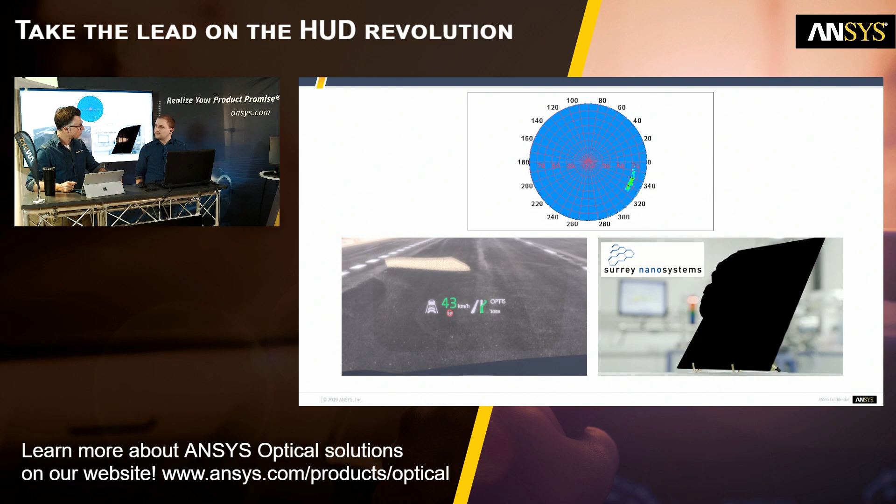Thank you, Cedric, and hello everyone. So as Cedric said, the agenda of today is to talk about the stray-light issue. It's a very common issue in head-up display systems that happens on almost all head-up display projects. So today we will first see how to detect the critical sun direction that will create this issue. Then we will see how to simulate this issue, and then we will see how to solve it in a very efficient way using the Vantablack material.

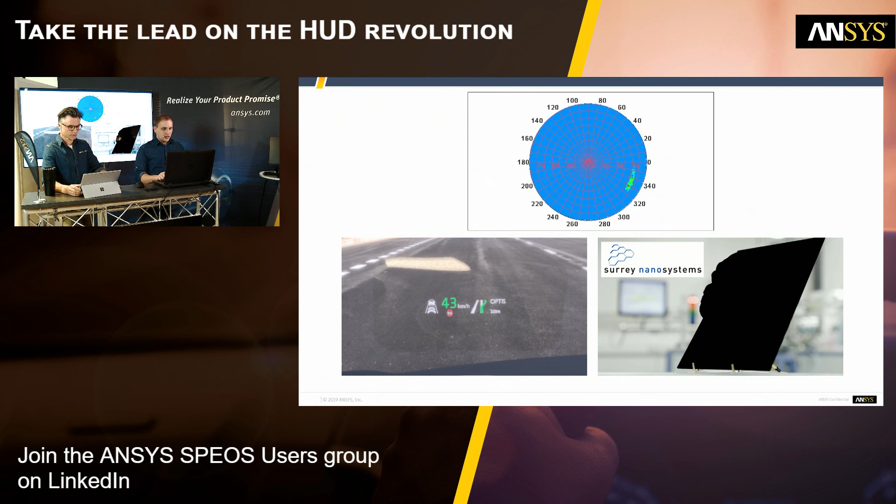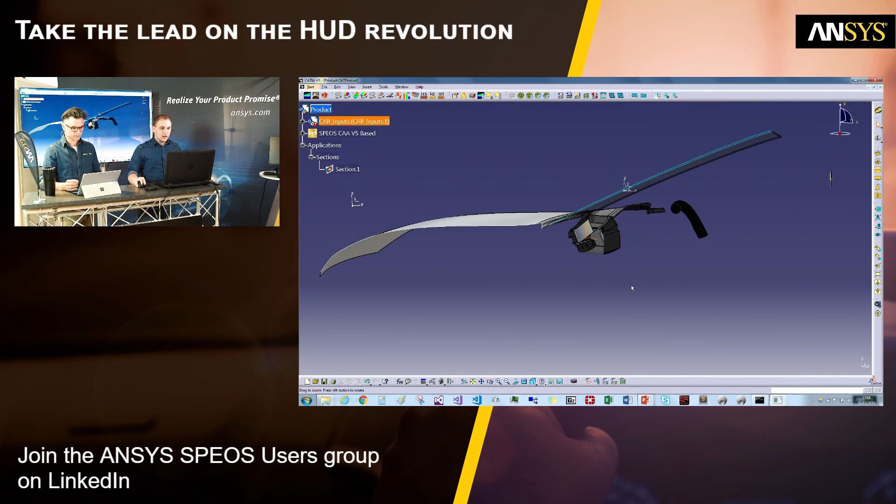So first, how to detect the critical sun position. So for that, I propose you directly go into the CAD software. So here I have an example of a simple head-up display system. As it's only for demo purposes, it's quite simple. If we have a look inside the housing box, we see that we have the mirrors, we have the picture generation unit, we have the housing box, the baffle, and the bezel. So a basic head-up display unit.

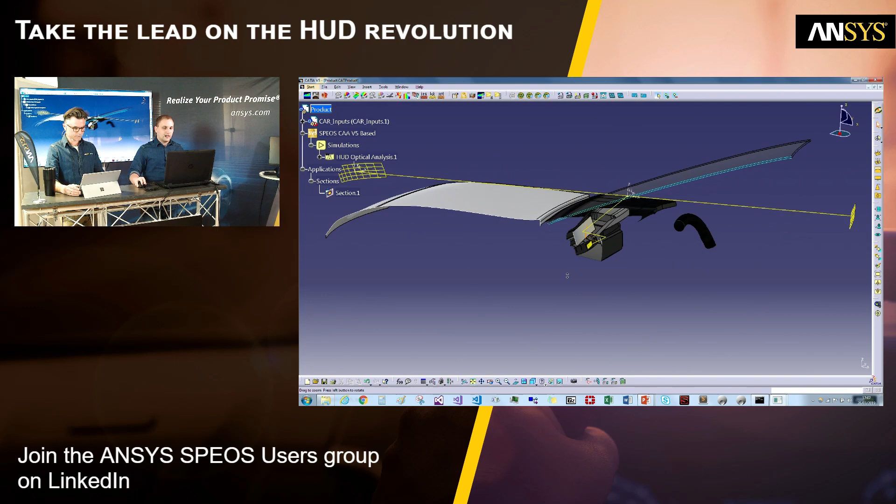If we have a look at the HUD Optical Analysis simulation, so if you don't know this kind of simulation, you can review the previous webinar. We already talked about this kind of simulation. So this heads-up display optical analysis simulation shows that the picture generation unit will create a virtual image here, visible from this eye box. So on my data, I put an axis system on my virtual image that I will use later, and also an axis system on the intersection of the optical axis and the inner surface of the windshield that I will also use later.

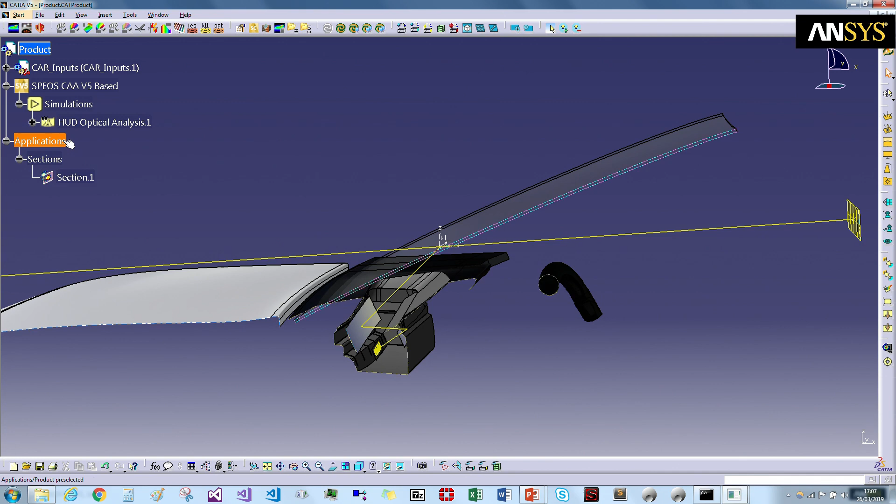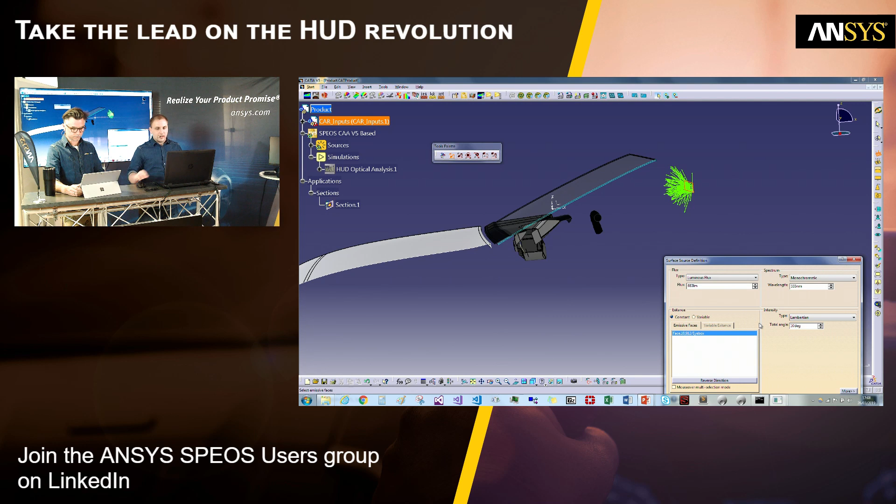So the goal of the first simulation we will do is to detect the critical sun position. So for that, we will emit light from the eye box and collect the light all around the environment. So first, we will define sources in the eye box. Oops. So here I have a source. I will collimate the source to send the rays in the interesting part, the head-up display system.

I don't care about the flux and the spectrum because for now, all I want is to detect the light path that connects the eye box to the environment. So for now, I just want to send rays to have this connection. And to collect these rays, I will create an intensity sensor here.

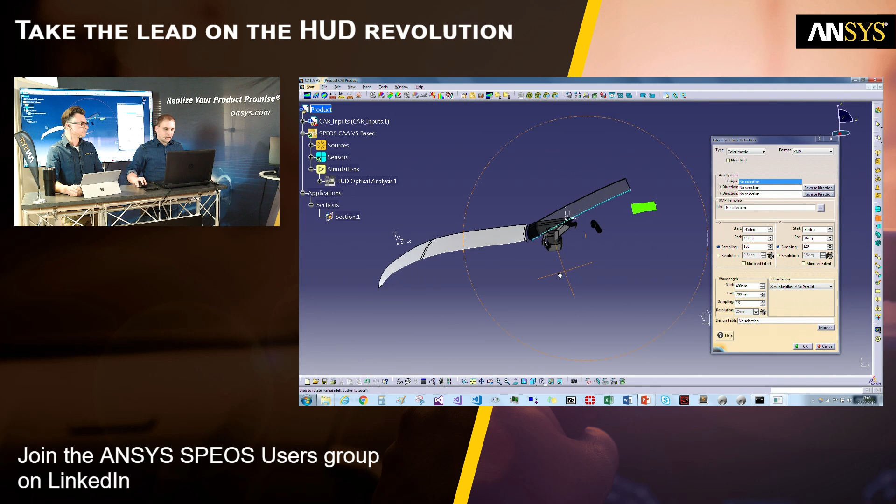So like that. So this way, I will just use a conoscopic sensor and cover more space.

I can increase the sampling of the sensor to have a better resolution. So now all the rays can be sent from the eye box, will be propagated into the system, reflect on all the part of the system, and then be collected by the sensor.

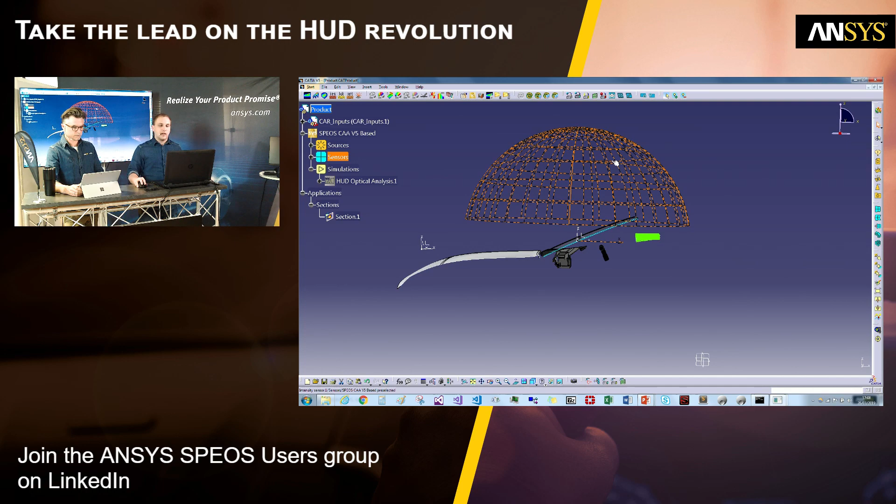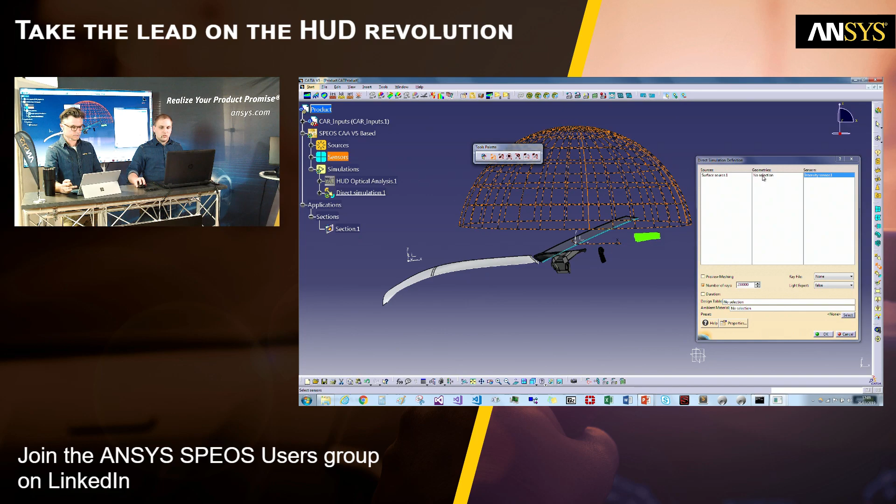So from that, I will create a simulation here, a direct simulation, where I will add the source, the sensor, and the geometry. So on the geometry part, I will add the picture generation unit, the windshield. I can add the eyebox also.

I will add the housing parts, as it's mainly the housing part that will create the stray light issue with the mirrors. So I will also add the mirrors. And I can add other elements here. For example, I will add the dashboard.

I will increase the number of rays I send. I will also activate the light expert mode because I will need this mode to visualize the rays directly in the 3D view of the CAD software, to visualize all the light paths that connect the environment to my eyebox.

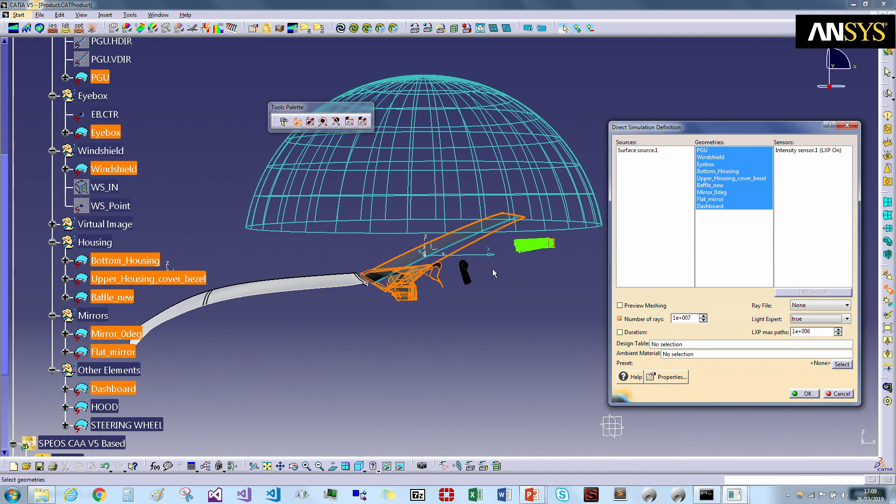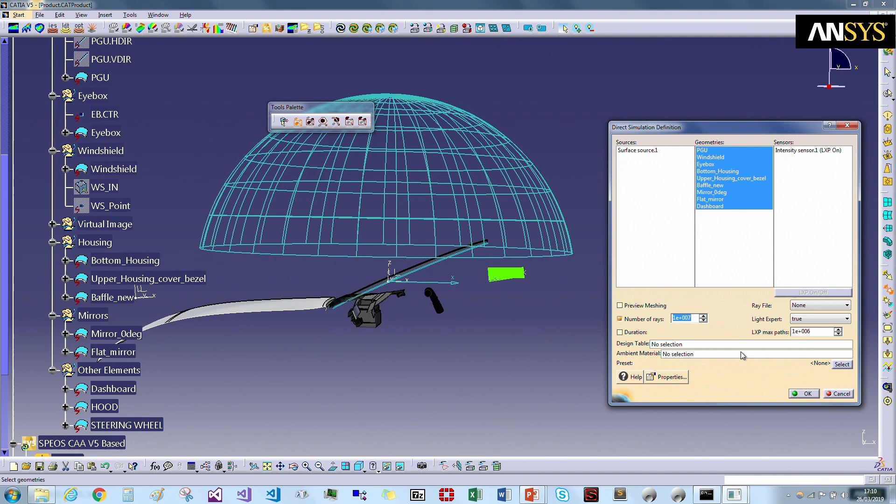And also here it's linked to the data I have. Here on my windshield I have two surfaces that represent my windshield, but I want to consider my windshield as a body. So I need to activate the volume optical properties on surface of the simulation, the VOP. So from now my simulation is correctly set.

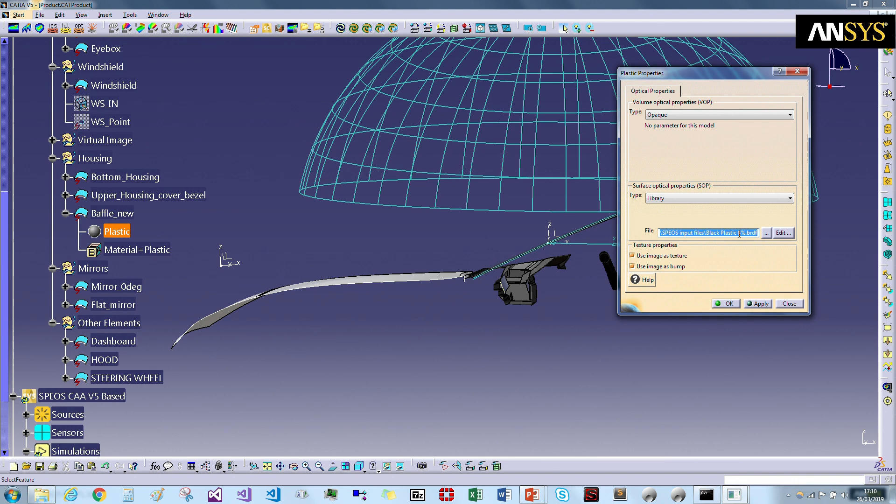I already applied the material to the geometry. So here if we have a look on the baffle, for example, I already have a material with Speos properties already applied. So here we can see that we already apply a black plastic that has about 6% reflective part.

So from that, I will run the simulation. And during the simulation, all the rays will be sent from the eye box, will propagate into the system, reflect on all the geometry I set, also the mirrors and also the housing.

And then I will collect back the rays on my intensity sensor, and it will create some hot spots on my intensity sensor where I know there exists a light path that connects this hotspot to my eyebox and that can carry a lot of light, I would say.

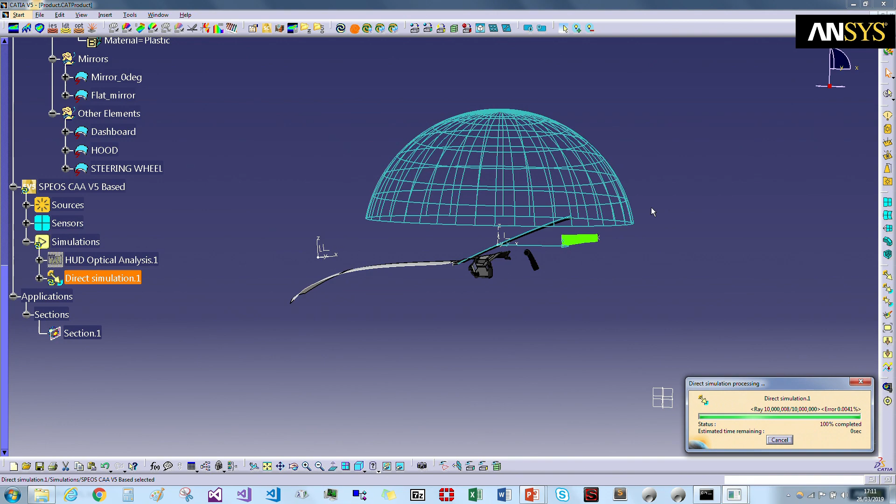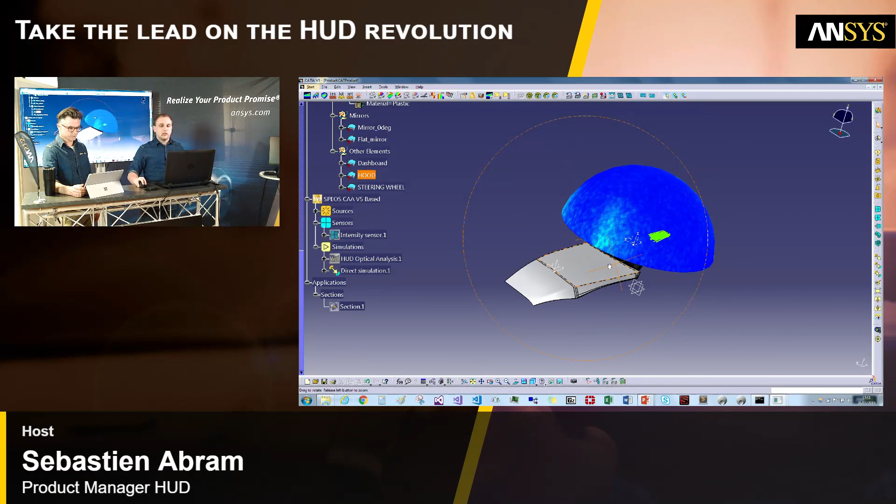So here's the result of the simulation. I will just hide the sensor and the section here. Okay. So here I have the different critical sun positions. We can see in red the very critical sun position, in blue the non-critical sun position.

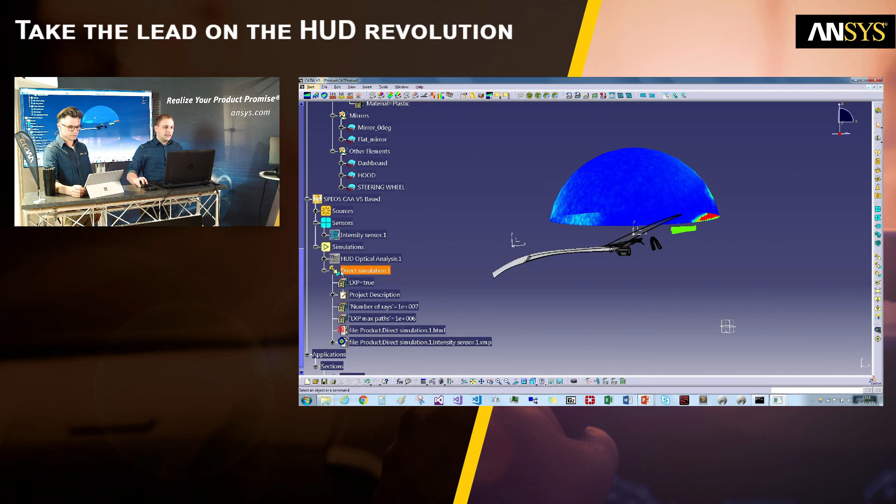From that, because I activated the light expert in the simulation, I can reopen the result and visualize in the 3D view the light path that connects one specific sun position to my eyebox.

So here, for example, we do have some.

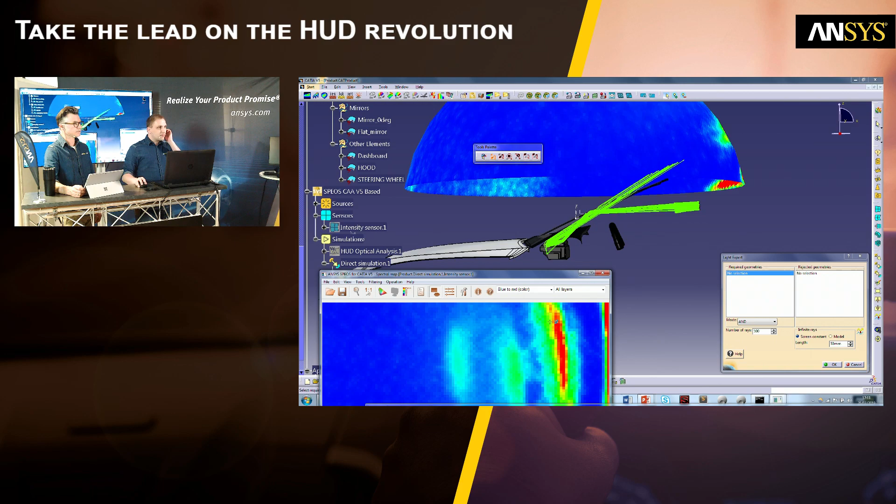How do you currently solve stray lights? We do have some words - they use CAD, physical prototypes, ray tracing, and simulations.

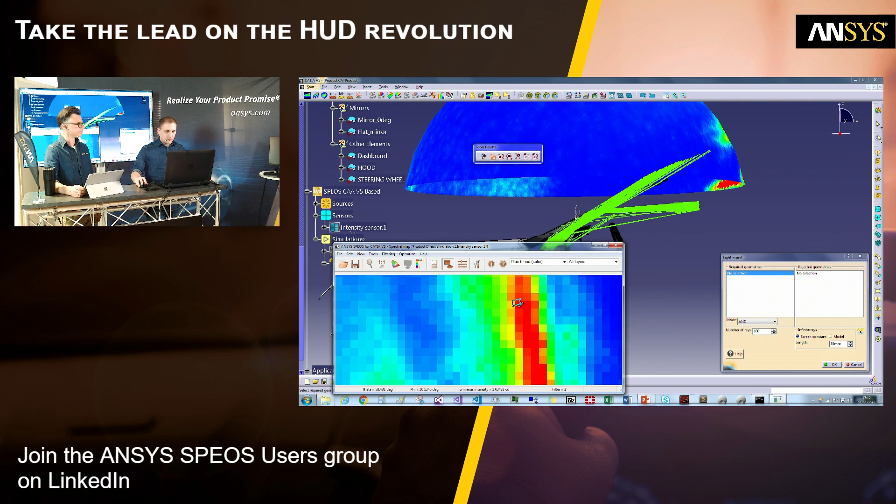And we will analyze this area right here. I will reduce the number of rays displayed to visualize more correctly the light path. I will also...

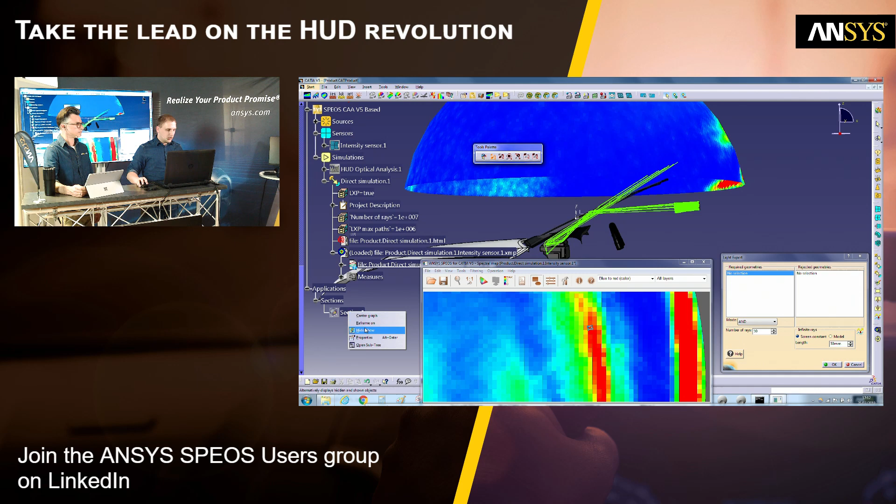activate the section here. So from this hotspot, from this sun direction, what we see is that the light goes through the windshield, then hits the top of the freeform mirror, hits the bezel, and then hits the windshield, and then goes back to the eyebox.

So from this critical sun position, some rays go to the eyebox and can create stray light. So I will extract these rays here, clicking this button. Here, okay, okay. So here it converts my light path into geometry.

So now I have a line that I can use as a critical sun direction. So from all this line, I will extract one specific line.

Up here, sorry. So a point here, and for the direction I will choose one of these directions. All these directions are almost collinear. And I will use the infinite ray.

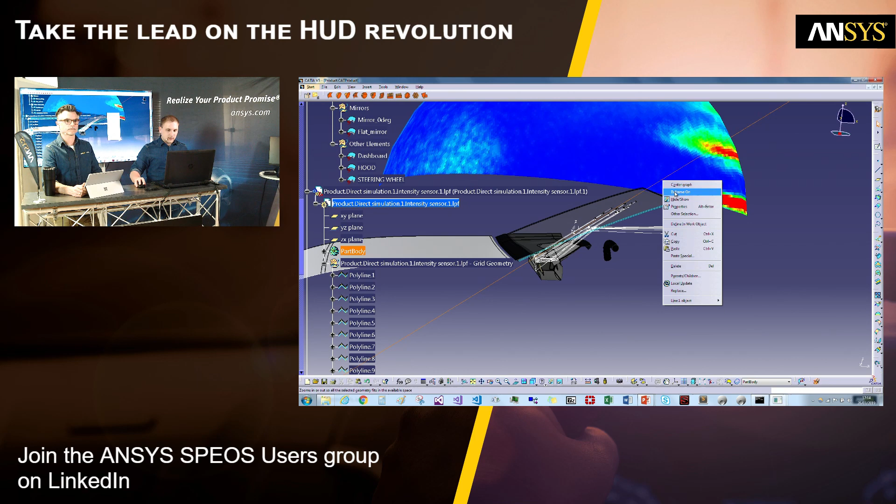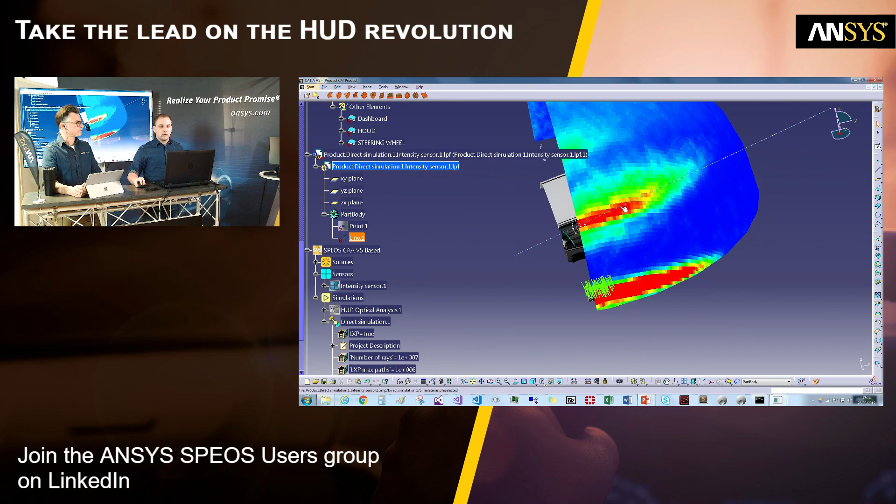I will just isolate this ray here, so I can delete all the other geometry, so we have a more clear view on the 3D view. And here this ray correctly goes in the direction we analyzed, of course.

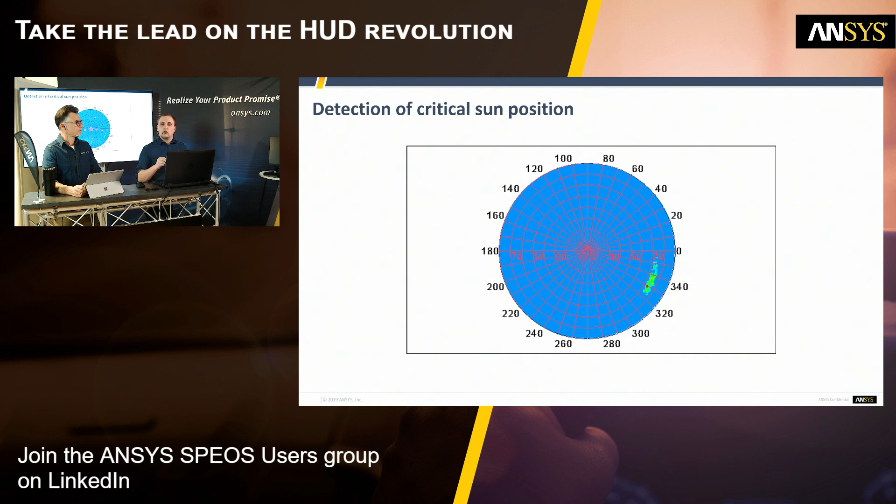So this way we saw how to detect the critical sun position. So here it's an example also on how to extract one specific critical sun direction. Of course, in the real use case, you need all the geometry of your heads-up display, and you also need to analyze all the critical sun positions.

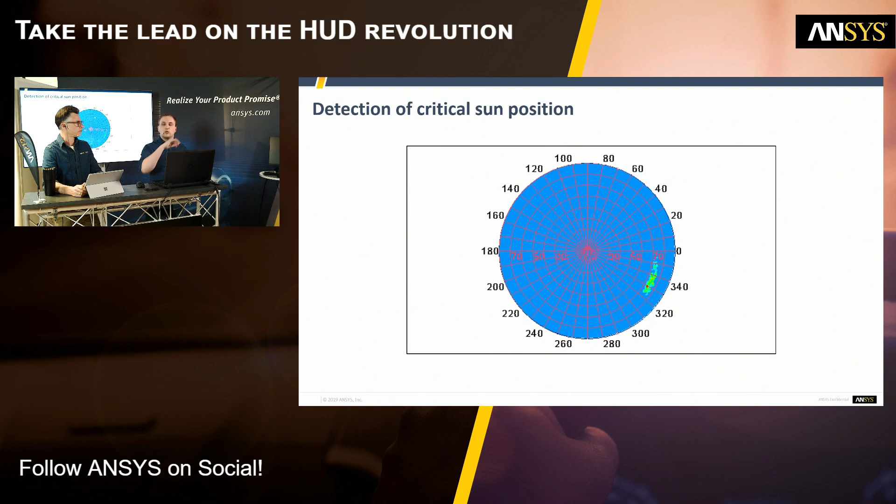From the sun position we extract, we will simulate the issue. So from that, it's very simple. Now we have all the elements to do the simulation. So as we have now the critical sun direction, we will just create a sun on this direction.

When you say simulate, you will qualify the issue. Yeah, we will experiment it as on the real car, in fact.

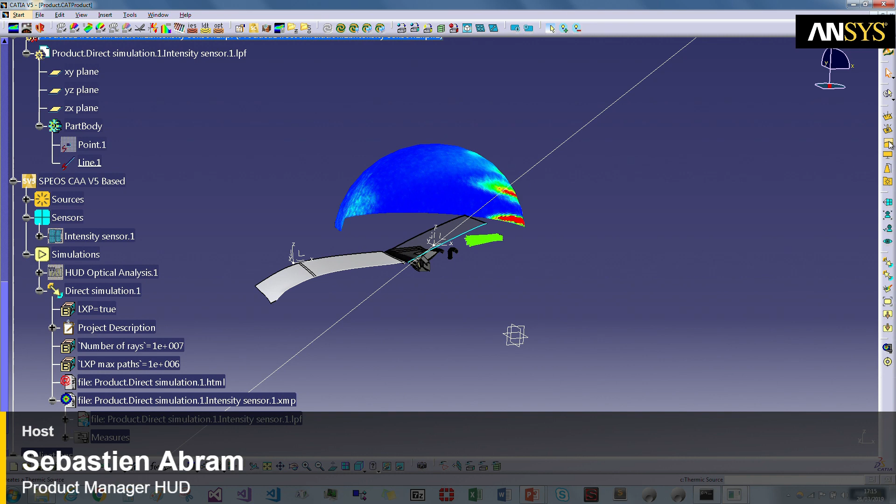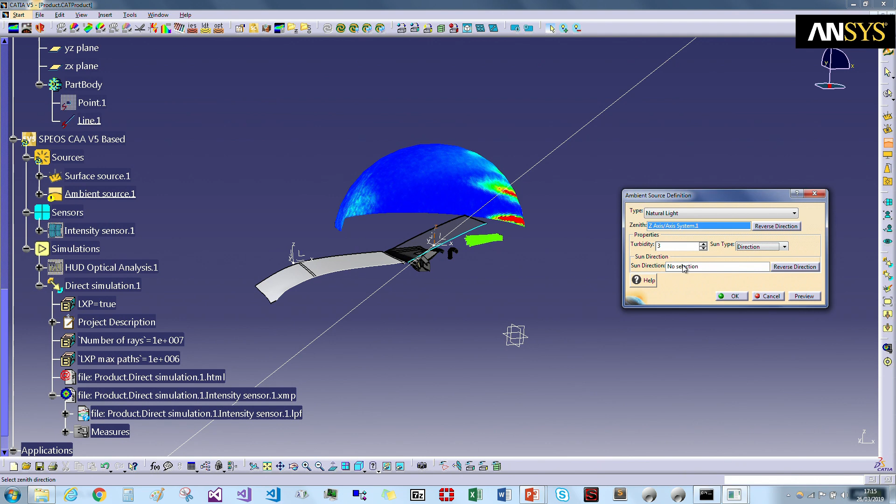So I will use for that the environment, the ambient source. It's not a product, I need to be on a product context to create a Speos element. So I will create an environment, ambient source, sorry, a natural light, and here I need the zenith of the sun. And for the sun direction, I can use directly the line I created here.

I will click OK, and now I have a sun in this direction. I need a sensor to visualize the result as the real driver. I will use this one, the radiance sensor, and I will use the axis system I placed on the virtual image to create it.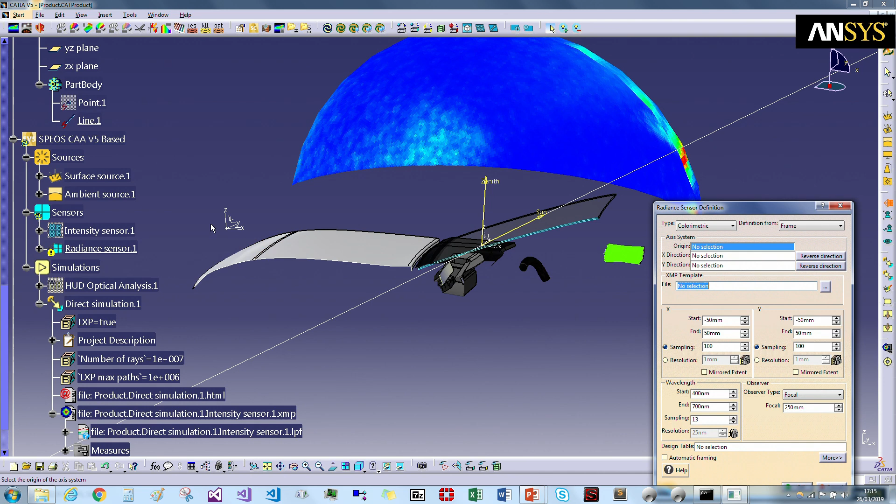I want to observe this image from the eyebox. So here I will say that I want to observe it from the eyebox. I will increase slightly the size of the sensor. And I will click OK.

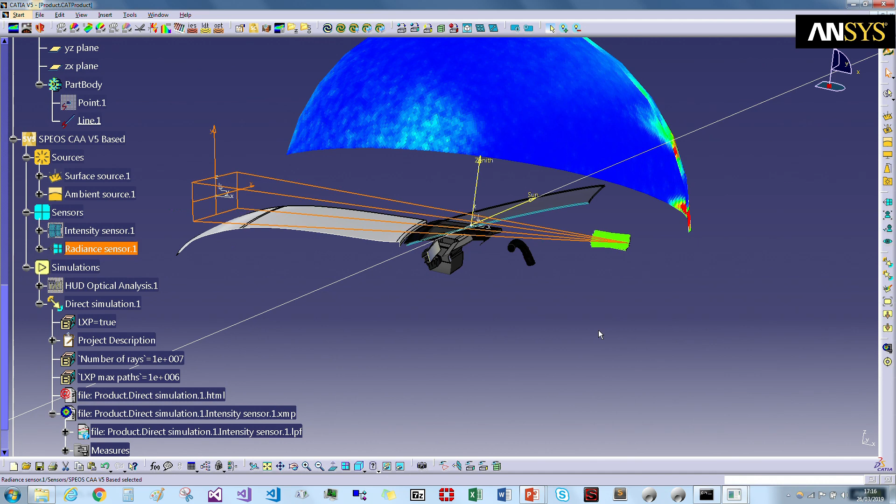So now I have my source, my sensor. I could add also an environment source if I want to visualize my heads-up display and the straylight issue in the environment. And from that, I can create a simulation where my source will be the sun, so the ambient source. My geometry will be the geometry of my previous simulation. I can also add some other geometry, the HUD, the steering wheel if I want. And my sensor will be the one I just created.

Also, for this kind of simulation, I need a lot of rays, so also a lot of computation time. So it's why I won't run this simulation live, but I will show you the results.

So here with this material, a black plastic that reflects 6% of the light, we obtain this kind of result.

So we clearly see the heads-up display. We see also the environment, but we also have this big issue, the straylight issue, that is totally in the field of view of the driver.

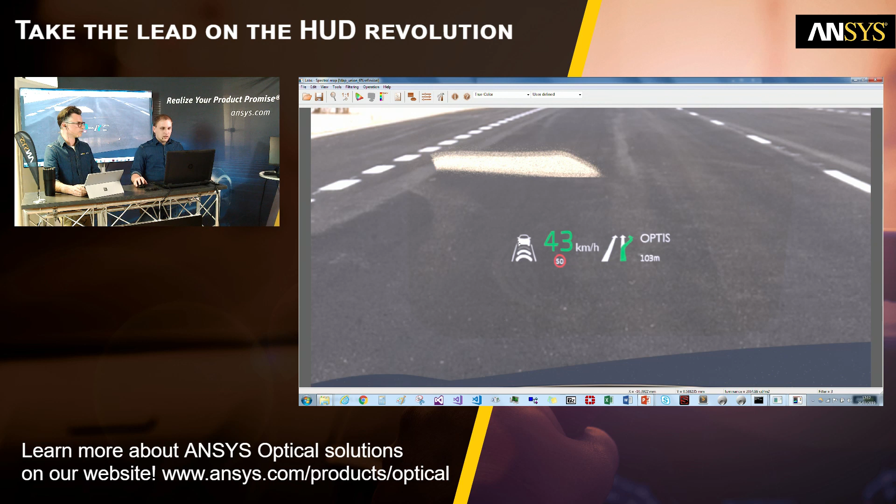So now, after experimenting with this issue, we can propose a solution to solve it and present the Vantablack, a material that can solve this issue. I will let the hand to David to present the Vantablack.

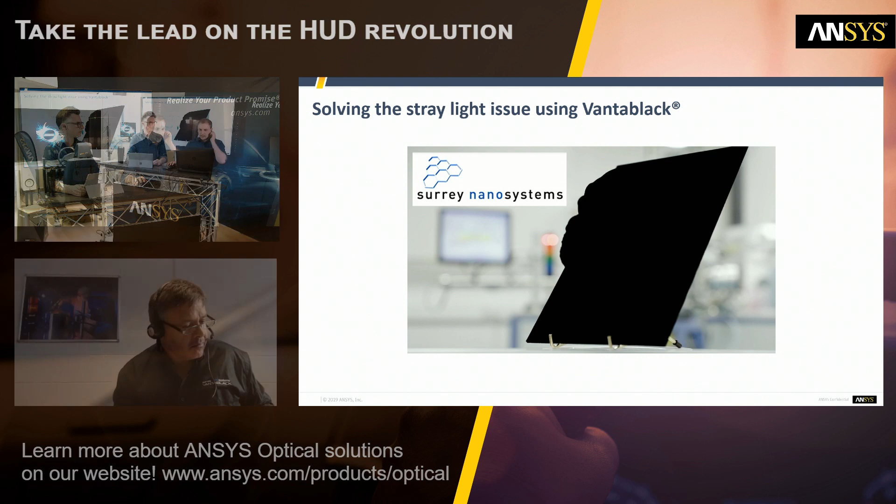Sebastian. Can you hear me okay? I'm getting quite a lot of reflection. We can hear you, excellent.

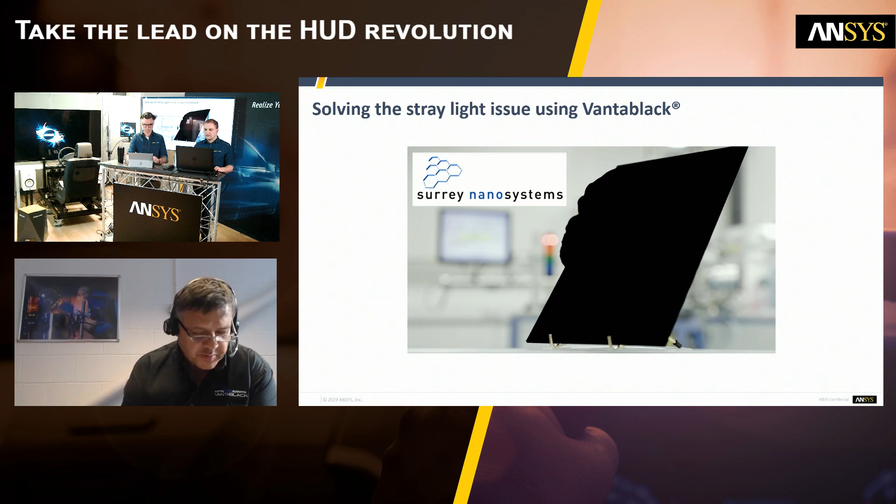Yeah, good. So we just heard from Sebastian how Speos can detect and help us resolve issues with stray light. And if it's not been possible to avoid those issues in the initial design, Speos has helped identify precisely what critical angles exist and how they might be addressed through either addition of baffles, change to the mechanical design, or, as is commonly done, the use of black coatings to absorb any stray light.

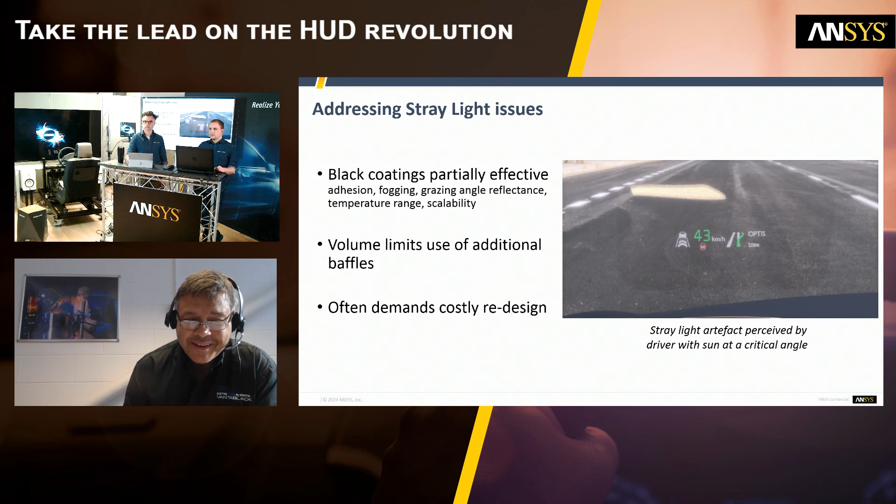Now, the designer has these different options available to him, but often they're quite limited. So volume in a windshield head-up display with the unit enclosed in front of the driver generally means there isn't very much more space, so additional baffles cannot be added. Redesign is always an option, but that can be expensive and time consuming.

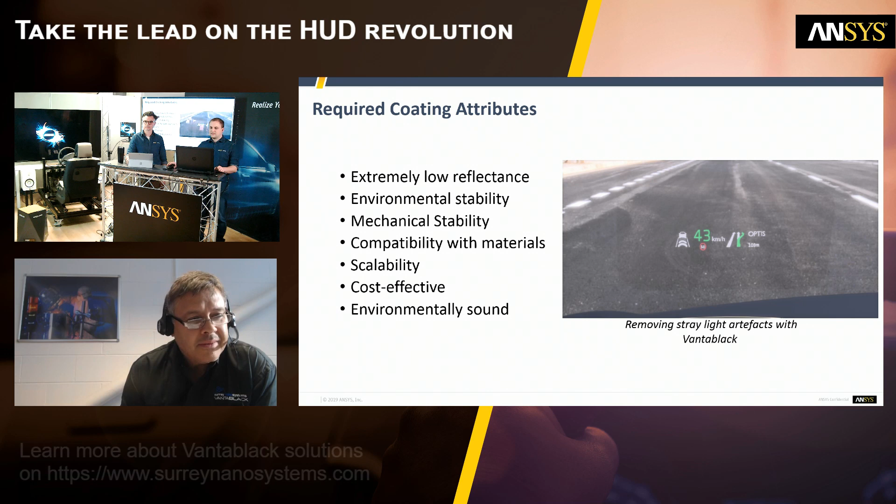So black coatings are often selected, and they have to do a number of particular things. We've already heard about the importance of reflectance, and seen that with 6% reflectance, which is typical of the black plastics that are used, the issue is very much apparent. So achieving low reflectance, particularly at grazing incident angles, is hugely important.

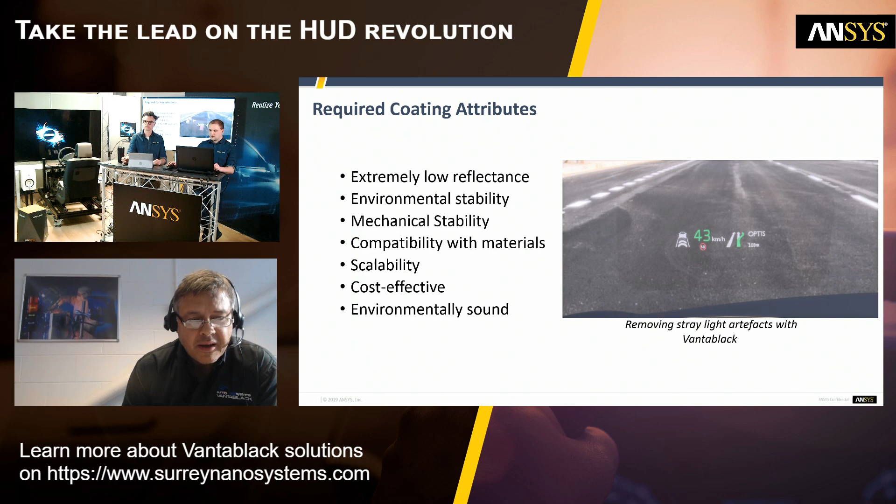It's an automotive application, so clearly the coating has to be stable in that environment. Windshield HUDs can reach pretty high temperatures. The car has to go over bumps and rough roads, so some mechanical stability is also required, environmental stability. And by scalability, I mean there are probably 3 to 5 million windshield HUDs being made today, and that number is going to increase. So we're going to have solutions that can be scaled up appropriately for the manufacturers.

So moving on to the next slide, we can pick on each of those different elements.

Vantablack is a coating that delivers all of those attributes we've just discussed. It does that by being a range of low density optical coatings that deliver extremely low reflectance, viewed from virtually any angle. At a micro level, the coating is pretty rough, and consequently its reflectance is effectively Lambertian.

The low density coating differs from a paint in that it is not a dense film. Consequently, it's anchored to the substrate in many different places, and that allows it to flex and be virtually immune from thermal mismatches, and to take levels of thermal and mechanical stress that you would not achieve with a dense paint.

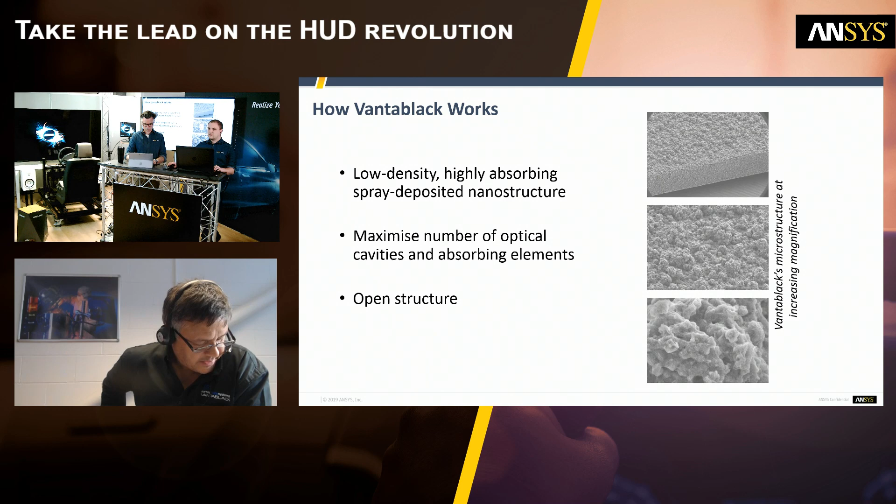As the structure has this low density, it's very open, and it can be made even more open so that light incident upon it is reflected internally before it is absorbed by the absorbing elements. That's what gives us this fantastic ability to absorb virtually all of the incident stray light.

Now, I have mentioned a couple of times that this is a structure, not a dense film like a paint. So it won't withstand the sorts of physical abrasion that a conventional paint will withstand. That's why we only use it in applications where it is protected in use.

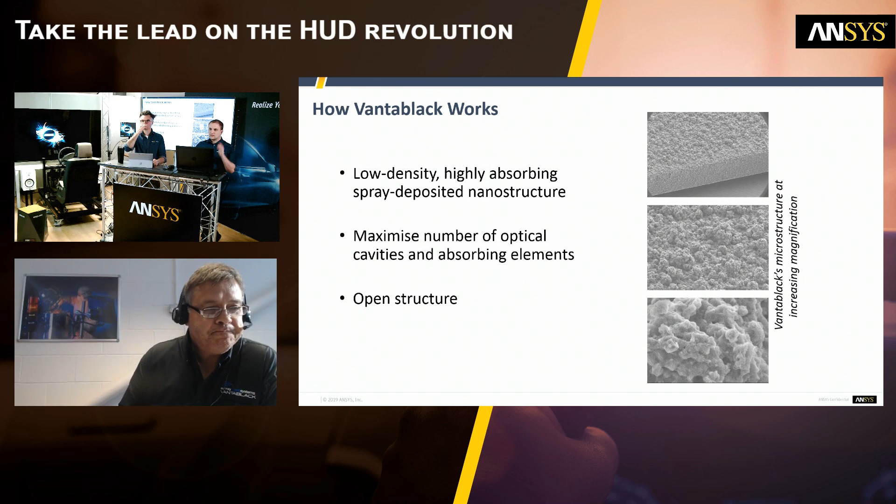We lose the sound? No? Do you have me back? No, yeah, no, it's okay. Good, yeah, get a lot of reflections.

Sorry about that. So the reflectance characteristic, as we mentioned, you have to have low reflectance, but not just low reflectance when looking at the coating from near normal incidence. It has to deliver that reflectance when there are grazing angles involved as well. You saw that very clearly illustrated in Sebastian's simulation a little earlier.

What you can see here is a graph of the bidirectional reflectance distribution function for Vantablack. This shows, even with a 70-degree angle of incidence from the illumination source, the reflectance of the material is very low - actually less than 0.5% across the entire range. That's what gives us the ability to suppress stray light and eliminate those artifacts that impact adversely on picture quality and hence the quality of the device.

Because this is a coating, it can be applied to multiple surfaces, including those commonly used in head-up display manufacture. Its retrofitting can help us deal with those issues.

So rather than show you a graph, we've got a little video here that shows grazing angle performance for a paint that's typically used, flocking or baffle foam, and Vantablack. And that'll loop round again.

Yeah, the conventional black paints have reflectances of anywhere between 3% and 5%, but at near normal incidence. If you increase the angle of incidence up to the 70 degrees shown here, then you'll be approaching 10% or more. Okay, thank you.

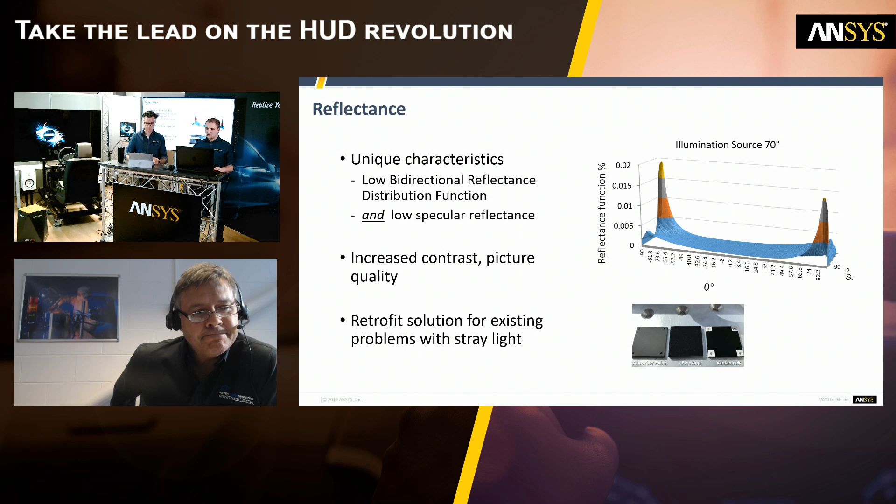So, we've talked about reflectance being critically important, but there are a number of other issues which will weigh on the mind of any designer doing this. Environmental stability is critically important. Vantablack was originally developed for use in satellite-borne Earth observation equipment. So it has to withstand the shock and vibration concomitant with launch, and survive the severe atmospheres, or lack of atmosphere, out in space. That means extremes of temperature, rapid changes in temperature, and shock and vibration.

In these types of applications, the material has to stay very firmly anchored to its substrate, because we cannot have particle fallout that would cause issues with any optics, since clearly this cannot be brought back to be repaired.

Because these absorbers are made primarily of carbon, and they are very open structures, very low density, there's no contribution to fogging. So in terms of space measurements, when we look at total mass loss and things like that, we cannot measure any, and consequently Vantablack coatings do not contribute to fogging when used in these types of applications. And also, in order to make sure that its performance is maintained over its working life, the coating has to stay super hydrophobic. That's critically important through life, because if the coating takes on water, then generally its reflectance will increase, and hence its performance will be diminished.

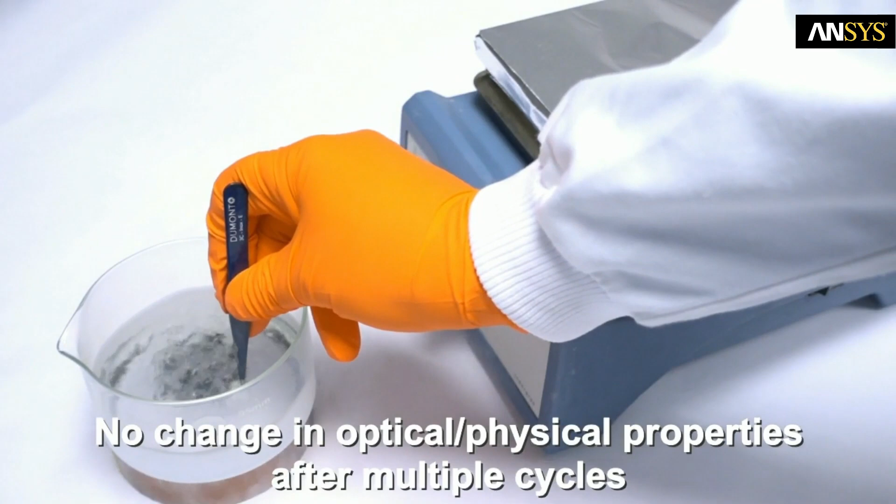And similarly, I think there's a little bit more there on hydrophobicity. First, David, I have a question. Where has the coating been applied on the microsatellite?

Yeah, so on the microsatellite, you can see that is a communications satellite, and it uses a star tracker baffle. So you see those things sticking out at the front. They're used to look at a map of the stars in order to position the satellite. Now, of course, looking at a map of the stars from space sounds easy, but you have the sun in the way, which generates a huge amount of stray light, which causes contamination of the signal. So Vantablack is used in there in order to reject that stray light and allow the satellite to be positioned.

Okay. There is another question regarding the temperature? Yes, there is another one. So can I apply the coating myself, and do I need any special equipment?

Vantablack is made up of a range of different coatings, ranging from the ultimate performance at much less than 0.2% reflectance up to around 1%. Those that have the higher reflectances can potentially be applied directly by customers and users. There's a significant amount of capital equipment and expertise required to develop and deposit the coatings which deliver the very best performance at less than 0.2% reflectance in the visible spectrum. Thank you, David.

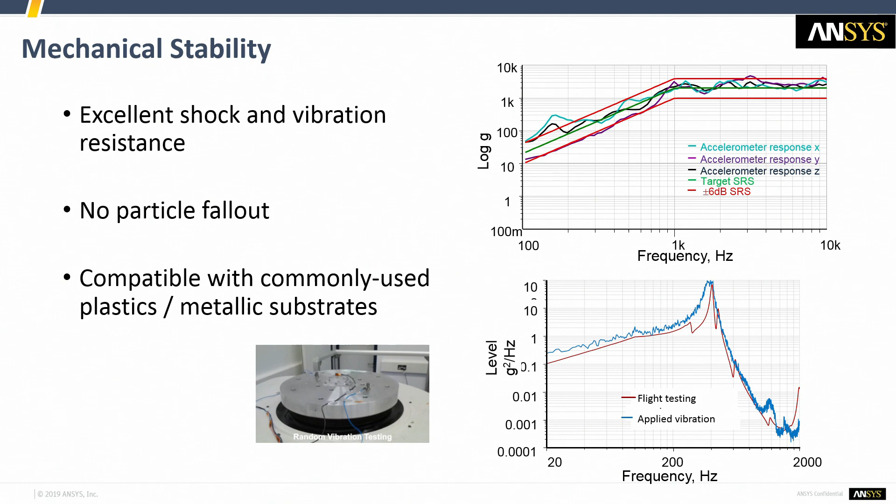And as a space qualified material with legacy, you expect that it would be able to withstand severe shock and vibration, and it would do that without generating any particle fallout, which would otherwise obscure sensitive optics. But not only does it have to do that, it has to be suitable for use across a range of different materials, ranging from the alloys which are commonly used in space applications, but also onto plastics that are used in automotive manufacture, particularly glass-filled polycarbonates and cast aluminiums with magnesium content and things like that. And so that's been demonstrated.

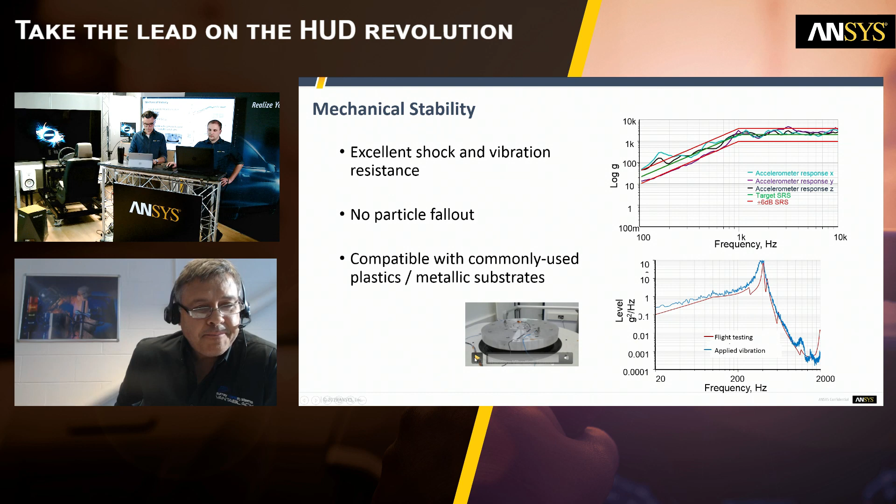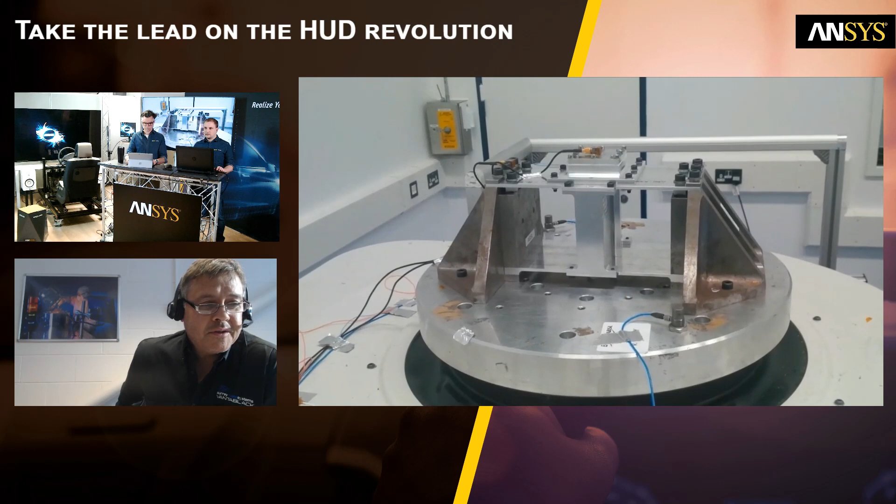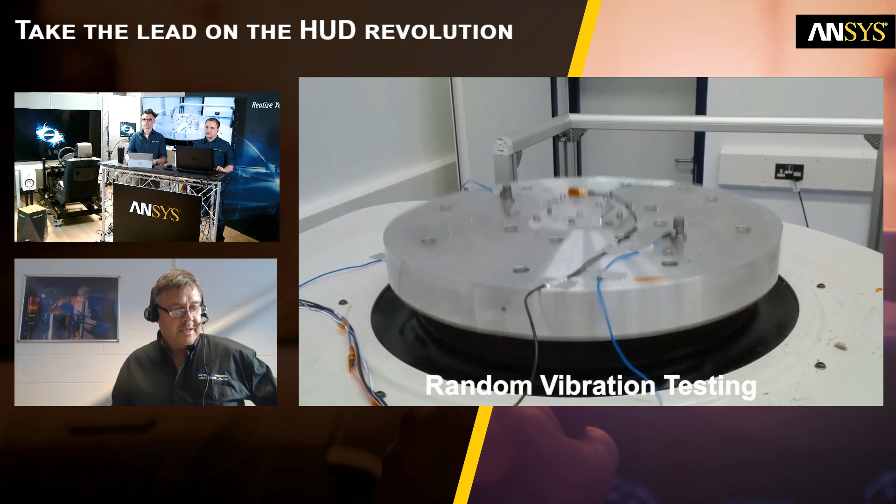Again, we can achieve very high levels of shock and vibration resilience. You can see that here. You need a big armature on a shaker to deliver the types of accelerations that are required for space testing. And here, similar thing with a beam that resonates at 400 hertz that can be tuned to do different things. That demonstrates how Vantablack is really very easily capable of withstanding the sorts of shock and vibration for space launch. Makes it ideally suited to automotive application as well.

Finally, just to talk a little bit about scale and scaling. Some of you may have seen at the beginning of last year, we did a 3,000 meter squared building at the Korean Olympics for one of the sponsor companies. You can see there a big building. It's about 3,000 meters squared. It was coated in one of our Vantablack products, and you can see there's a 3D star field there.

Each of those lights is on the end of a 2 or 3 meter long rod, but you can't see that because it's all coated in Vantablack, and you get that really interesting effect.

Impressive. You went there, David, to see? No, I didn't actually get to. It was too cold for me. So some of my colleagues were there getting very, very cold.

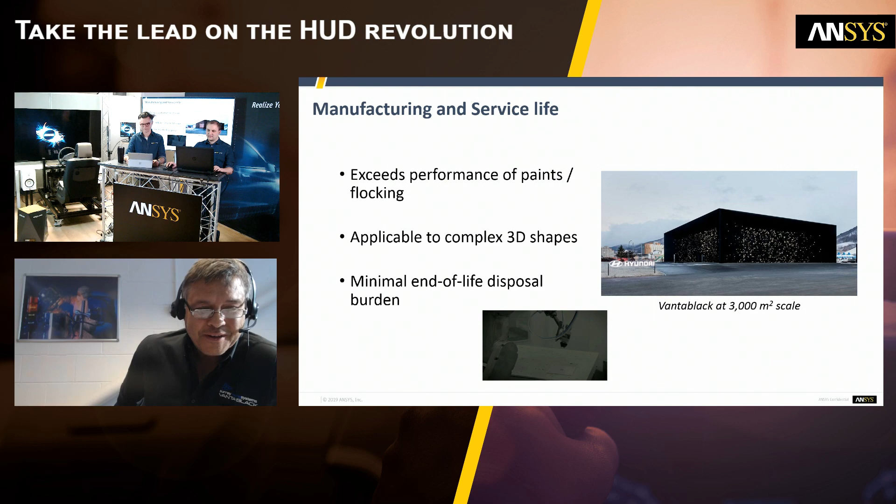Okay. But Vantablack doesn't mind the cold. Yeah. So we can apply it to 3D shapes. Can do it at really large scale. And because these materials are very, very low density, actually there's not a whole lot of material there. So in terms of end of life disposal burden, there isn't so much to see.

And there's one more short video on there which shows you a little bit of the way in which we can automate the spraying processes to suit different types of products, and how the post-processing is conducted where we wish to achieve the ultimate level of blackness using Vantablack coatings at a reasonable scale. Thank you.

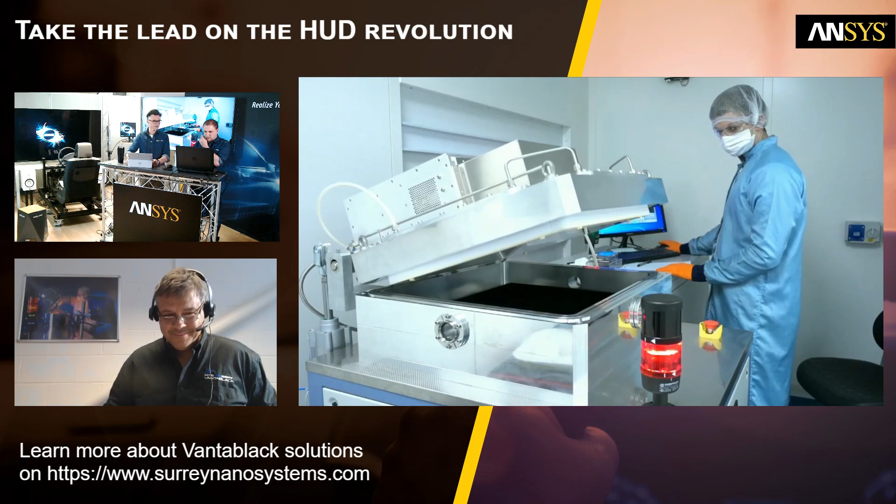Thank you, David, for this introduction and the description of all the characteristics of the Vantablack material. So now we will use this material to solve the stray light issue. So I propose you go back in the CAD software. So here, just remember we did the simulation that visualizes the issue like the driver will perceive it on the real car.

So now we will go on the Optis site and the Ansys Optis library. Here you just need to connect. You go on library, and from the library you can download the Vantablack materials that you can then use directly in a Speos simulation. So here you have the Vantablack material. You will download it. Then you will extract it.

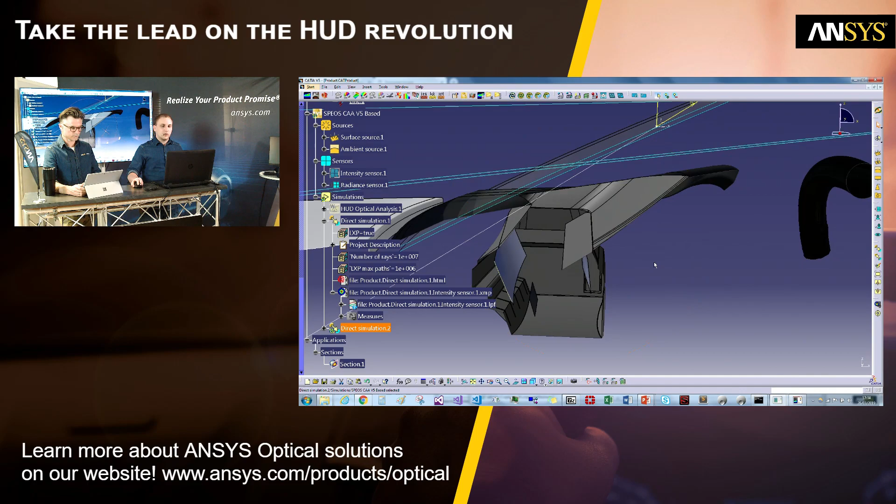So in the folder I extracted, I have the datasheet of the Vantablack with more information, characteristics, and also contacts. And I have the BSDF that I can use directly in Speos. So that's what we will do right now. We'll go back in Speos, and on the parts that create the stray light issue, we will apply it on the baffle and the housing bottom. We'll just apply the Vantablack materials here.

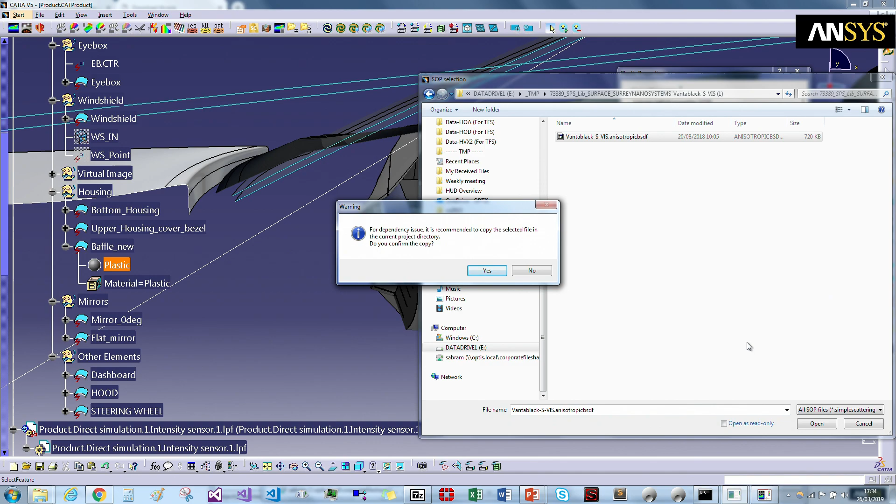We'll use the Vantablack material, open. So here I have a warning because it's the first time I use this material. Speos asks me if I want to copy the material into the Speos input folder in order to have all the dependencies of my project in only one folder. It's way easier when you want to share the project. So I will say yes. And here you can see that the Vantablack material has been applied from the Speos input folder.

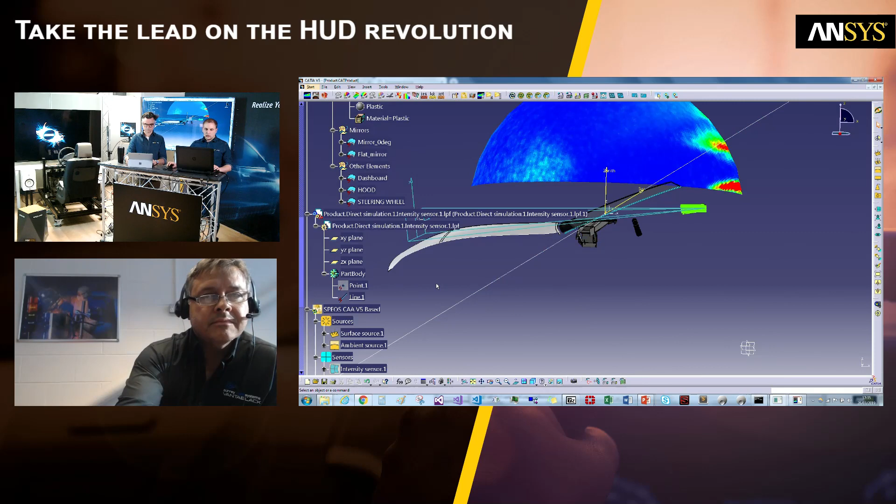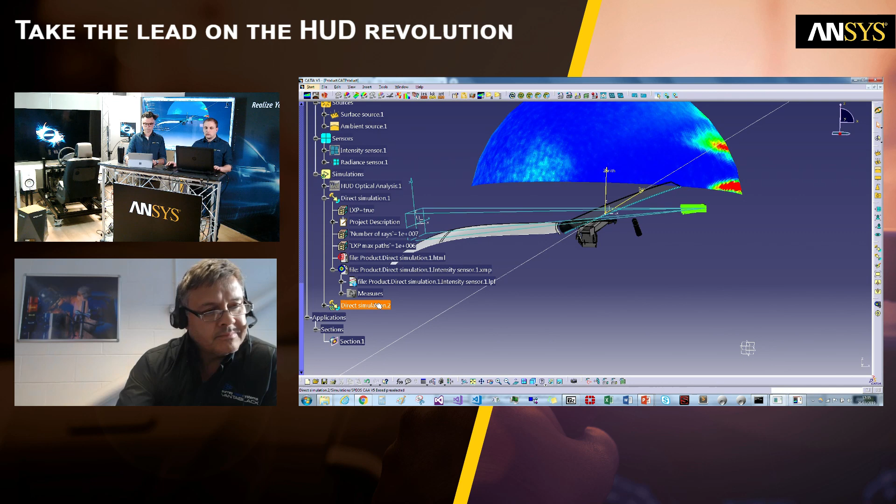I will also apply the Vantablack material here to avoid any stray light issue due to this part also. And now I can run my simulation again to see if I still have the issue or if the Vantablack corrects the issue. It's a simulation with a lot of rays that takes a lot of time, so I won't run this simulation during this webinar, but I will show you the results.

So you can see here the result. It's the exact same simulation as previously, except we apply the Vantablack, and you can see that the issue is totally invisible. There is no more stray light. We can go deeper and really look at the difference with the classic materials, classic black plastic.

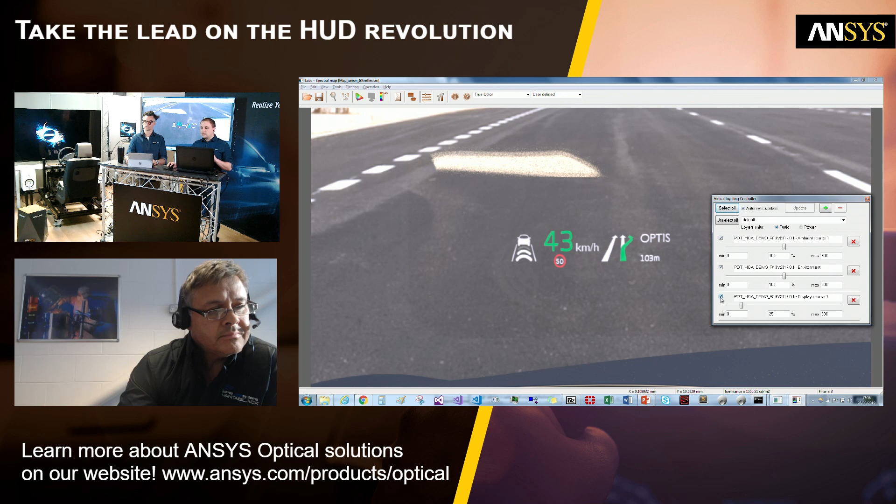If we use the virtual lighting controller, we can disable the contribution of the display source that represents my picture generation unit, and disable the contribution of the environment to really concentrate on the issue produced by the sun. Here is the stray light, and here you have the value of the luminance, so it's quite a high luminance.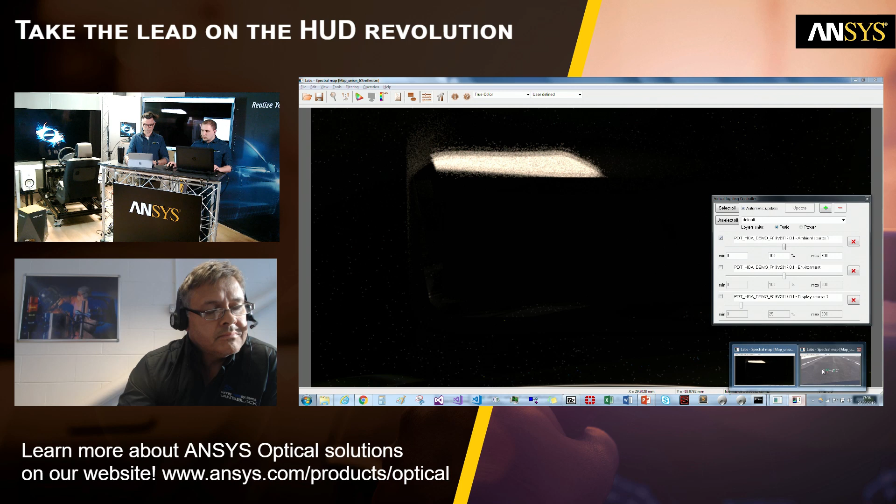And if I do the same on this simulation, I will remove the contribution of the picture generation unit and of the environment, and I have a very low luminance, so the issue is totally corrected and totally invisible with the environment and the luminance of the environment. So it's a very efficient solution for the stray light. That's quite impressive. Yeah, yeah.

How Speos can be used in modeling optical performance and hopefully avoiding these sorts of issues if it's used early enough. However, if you do find that there is an issue, Speos provides the designer with a suite of tools that they can use to identify those specific issues, and also allows them to home in on how they can be solved using a material such as Vantablack, which is entirely a retrofit solution.

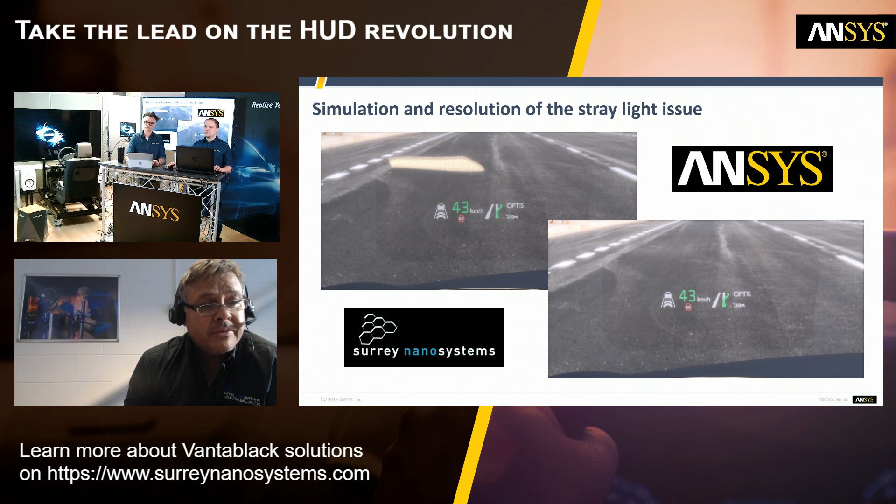Yeah, let's get kind of the wrap up. I think we know now how to detect the stray light issues in the HUD system, but globally, of course, the technique can be applied in any system. Then how to qualify, how to experience, and then the best way to solve it using these innovative materials, the Vantablack.

I have a question. How did you meet each other? How did you contact? You contacted David, or David contacted you? So yeah, it's kind of...

In fact, the stray light issue happens in a lot of projects. It's really an issue that happens too much, I would say, and we need an efficient way to correct it. It can be anticipated in some cases very early in the process, and the heads-up display box can be designed to avoid that, but due to the lack of space and also because you can't put pieces into the optical volume, otherwise you will create a shadow on your heads-up display, you need a very absorptive material, and that's why the Vantablack is perfect for that. So it's a very great solution.

Okay. Yeah, and just to add to that, we found that Speos was able to accurately show what users were really experiencing. And this was a very easy means to demonstrate that there was a solution by the use of a material that was sufficiently absorbing. And I think that's been a really useful process, both for the device designers and makers and also for us.